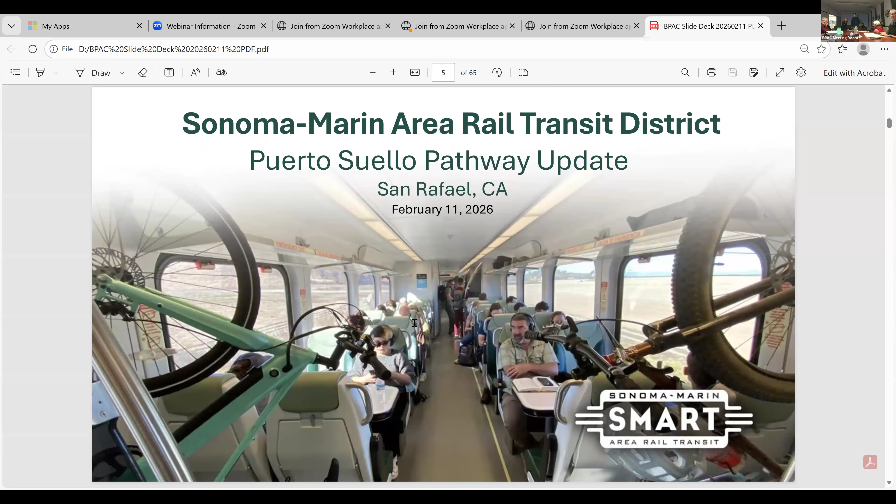So there's our SMART Train. Hopefully people have ridden the SMART Train. I was going to say, I know some people are probably very familiar with this area we're talking about. So you've ridden on the bike path parallel to 101, the Caltrans bike path. You're coming up here, and currently there's a choice: you can go down Los Ranchitos Road with the cars, or stay on the Caltrans path and go down Merrydale Road, which is a little steep, with lots of driveways and cars. So that's the current situation, and then you get to meet back up with the SMART Path.

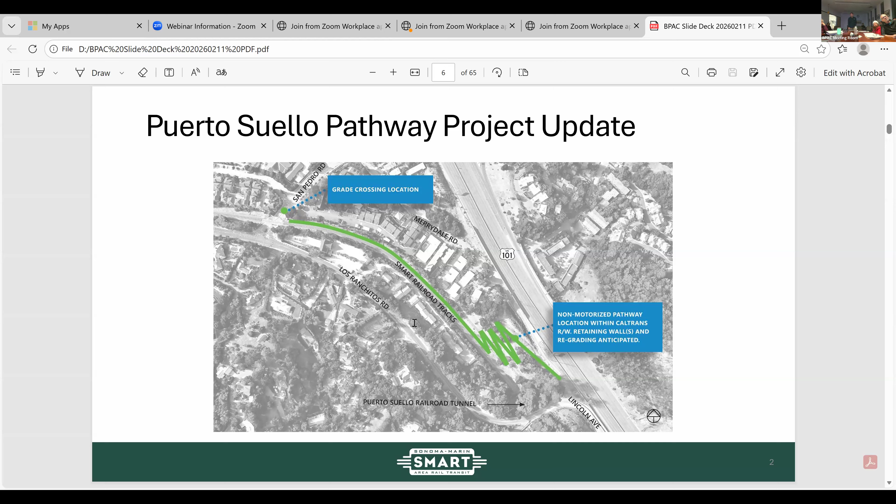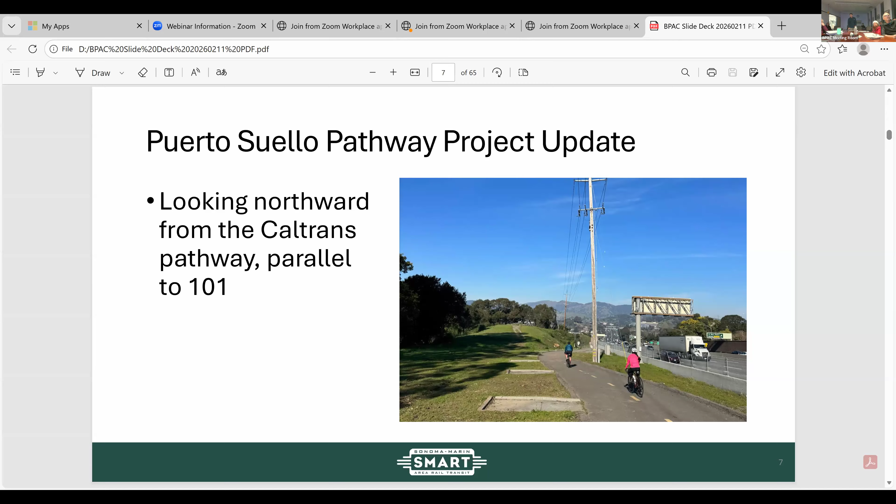In May 2022, a feasibility study was done, and there had been work done prior to that looking for a better way to get from the Caltrans path. Various routes were studied, and at this time, the path we ended up furthering the design on was decided to be the best option.

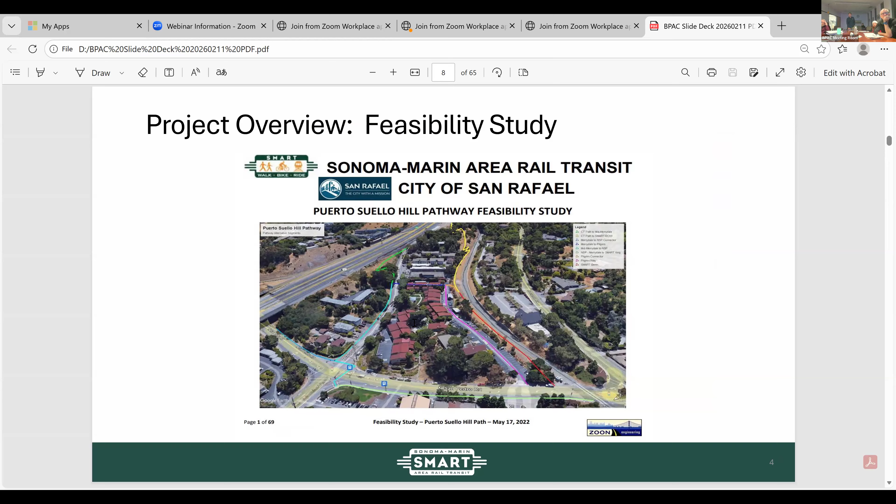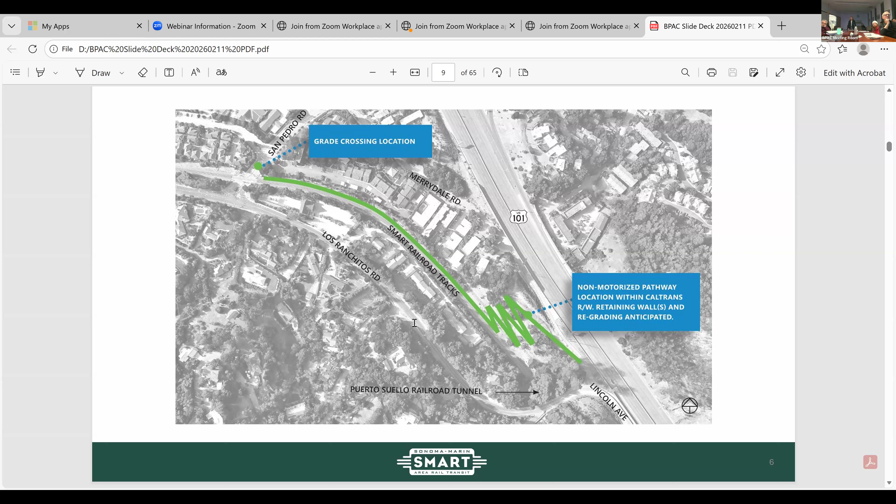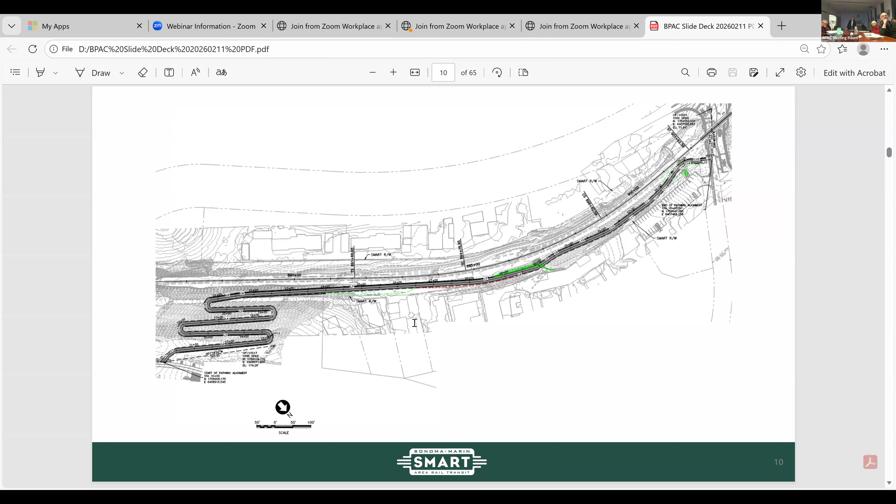The existing slope is 2 to 1, or 1 to 1, which if people aren't familiar with that terminology, that's basically for every 1 foot horizontally you're stepping, you're going up 1 foot. So it's 1 foot to 1 foot versus 2 to 1 -- it's a little more gentle, but still really steep. And so we kind of hit these bends, and you start the rounded switchback portion.

What that does is, as we get halfway through kind of the straight edge, you need a retaining wall to hold back the existing slope. We're kind of cutting into it and then switching back again. So that process repeats. We have some chain link fence closing those gaps of the retaining walls, and the switchbacks themselves being rounded -- there's some unique features there too that we'll discuss.

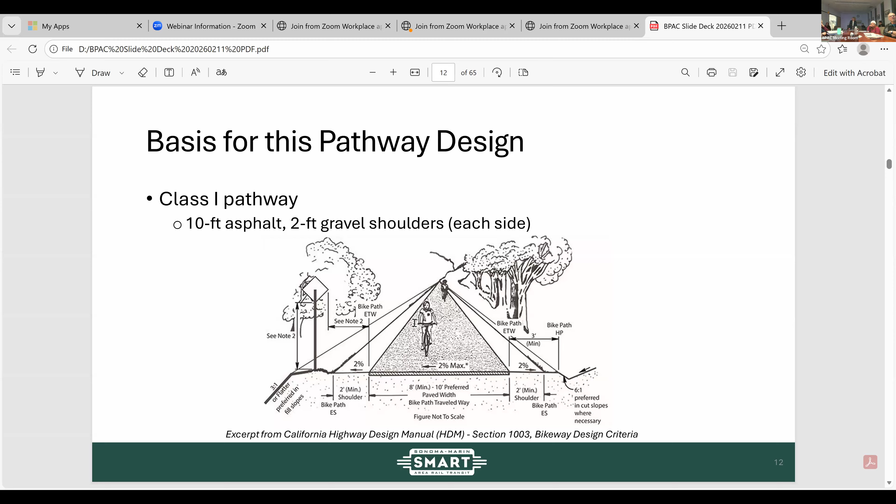Next up, for the fence -- obviously the exact typing can be determined, we're still at that preliminary 30% design. As the graphic shows, kind of a standard chain link fence. Smart has a sort of standard black vinyl clad fencing as well. It's a little shorter, but would still aid in kind of containing users of the pathway to use the actual footprint of the pathway and not decide to deviate or have a little adventure.

And so a chain link fence on the track side for that long linear portion, separating the tracks and the pathway. And then, like I said, closing the gap between the retaining wall systems and kind of the downhill track side of those various kind of stepping switchback portions.

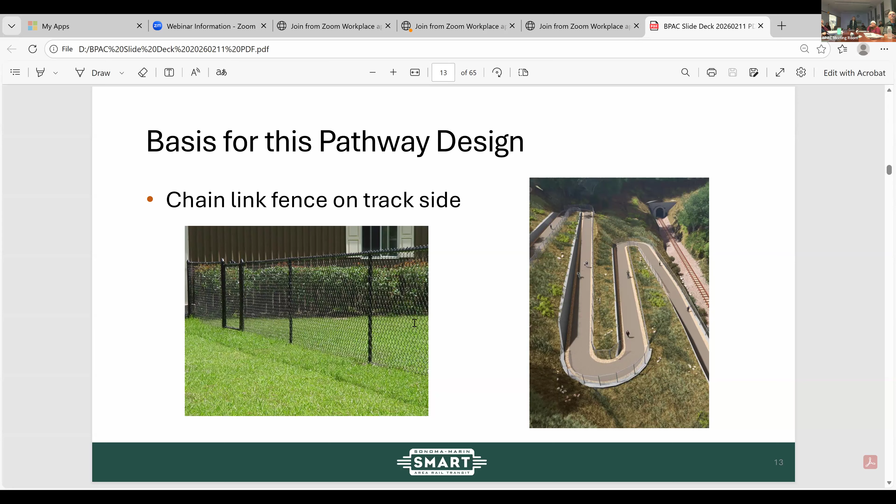The pathway is going to meet ADA requirements. So it's not only going to meet the Caltrans guidelines for a class 1 pathway, but we worked hard to try to make this shared use facility usable by all ages and abilities. Part of that, not to get too deep into the math here, but we are able to have a longitudinal slope of 5%, which is the ADA max for a pathway like this.

What that means is similar to a 1-to-20 slope. For every 100 feet that you would be cycling, jogging, or walking, you would just be rising about 5 feet. If you can visualize that triangle, that's about the gentle slope maximum we wouldn't exceed for this pathway. It's particularly pertinent for the switchback portion where we're having to really make up grade quickly. The long, spoon-handle parallel section only touches 5% when it absolutely needs to.

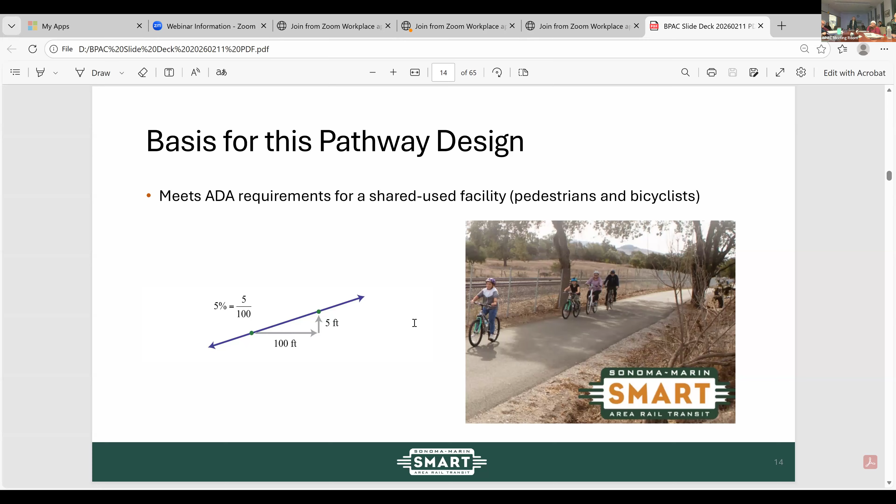The class 1 pathway preferred is 10 feet of asphalt with 2-foot gravel shoulders. We're actually proposing 12 feet of asphalt around those bends and curves, with 2-foot shoulders on each side, to better accommodate two single, non-tandem riders going up and down the switchback at the same time, as well as tandem bike movement.

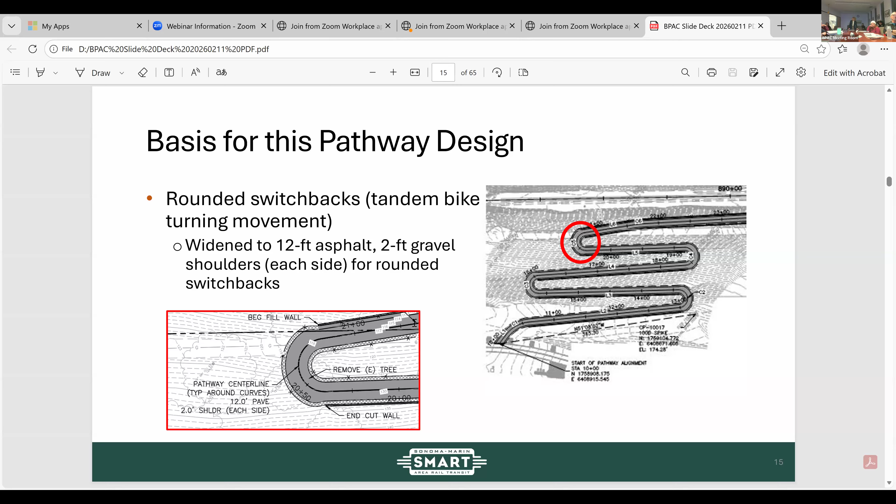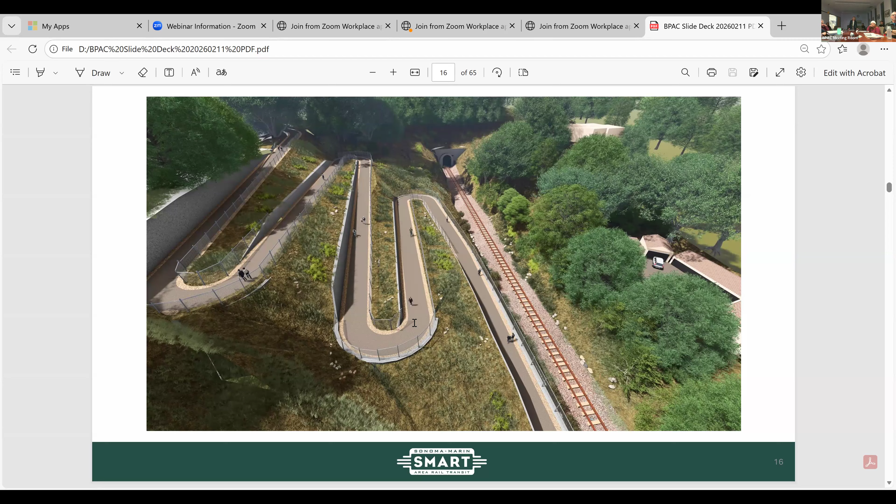So those are some of the high-level design features: retaining walls, fences, making sure those rounded switchbacks are as gentle and accommodating as possible, and trying to uphold all the class 1 typical smart pathway features. So with that, I'll turn it back to Judy.

Great. I know some people are very familiar with our smart pathways, and eventually we'll have the bike path the entire length, all the way up to Cloverdale. But we have 39 miles already completed, most of it class 1.

And right now we're extending the train up to Healdsburg and able to simultaneously build the path at the same time, which is nice. That was the same thing we were able to do with the extension to Windsor. So that's what we had just done already, but now we're in Novato.

There's a couple sections like that Hannah Ranch section I'm working on that's funded. Also in Santa Rosa, between Burnville Road and Airport, is funded. And then getting all the way to Healdsburg, that's funded. So those are the ones that are going now.

And then we have some others that are well positioned for grants and they're partially designed. What we tend to do now is design-build contracts, because it just works out really well—you often encounter utilities, soil conditions, or drainage issues. So it's tending to work best, especially since some of the sections we have left to complete are maybe the more challenging ones.

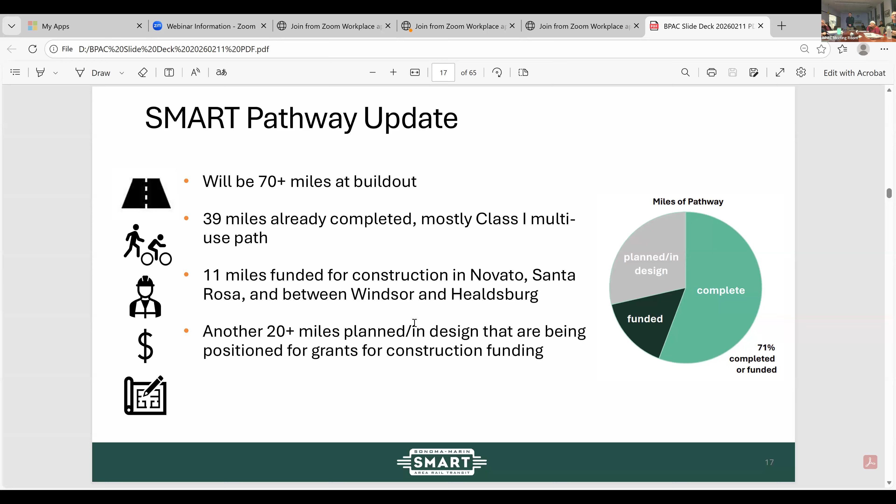So these are newly opened ones. If you haven't been up to Windsor, there are a couple nice connections there in Petaluma, Southpoint. Now you can go to Penngrove, and also Rohnert Park and Santa Rosa are now connected, as well as some people have been on the new section at McInnis up to Smith Ranch Road.

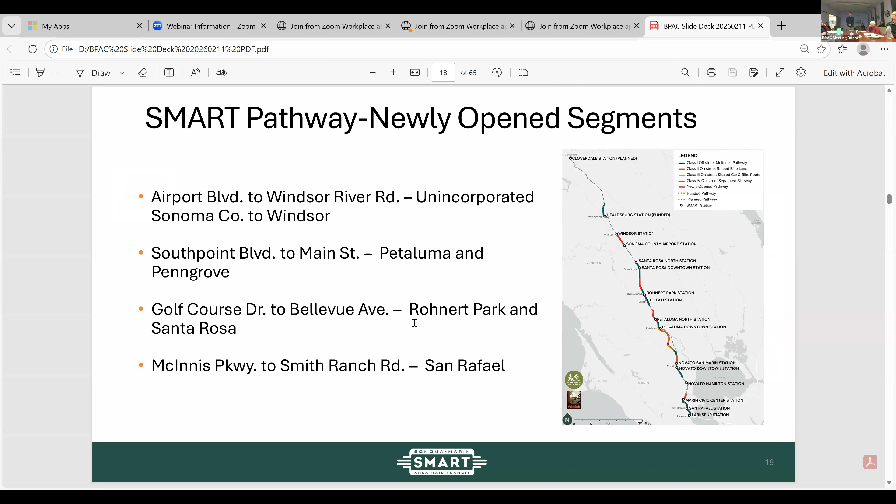And so we have now reached this 30% design milestone, and at this point, unfortunately, we can't just build it right away. We have to kind of put a pause here because we do need to get the funding to be able to do this.

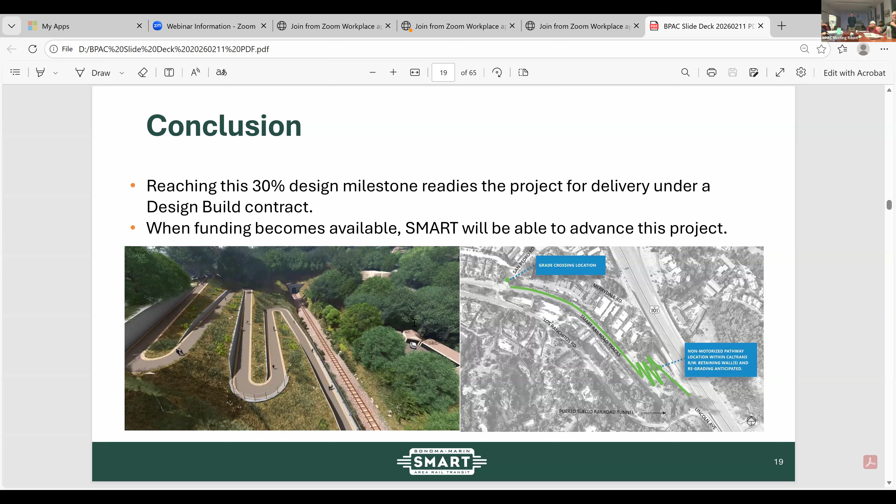And the great thing is we have a team of people that work on obtaining grants, and we've been successful with some. So we're working to do that. We're going to continue to provide updates. Right now we can answer any questions you might have.

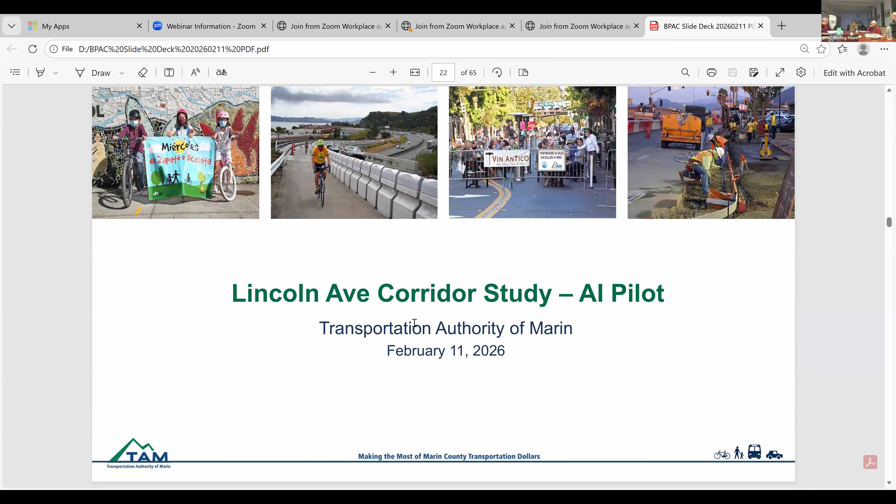Are you all familiar with TAM? We are the sales tax authority who administers the transportation sales tax, half-cent sales tax, working a lot on projects, plans, and programs all throughout Marin County.

The quick agenda of what we will flip through today: provide context and framing as to what the countywide transportation plan is, what the study's background is, context for why we're diving into artificial intelligence and relating it to Lincoln Avenue in this corridor. Then we'll walk through some of the high-level findings and potential treatment options that the tool developed, and dive into discussion and feedback.

TAM adopted the Countywide Transportation Plan 2050. Is everybody familiar with that plan? The Countywide Transportation Plan really lays out this roadmap and defines values, goals, and strategies for how we look at transportation within Marin County, systemically and holistically, focusing really on safety, equity, and sustainability at the core.

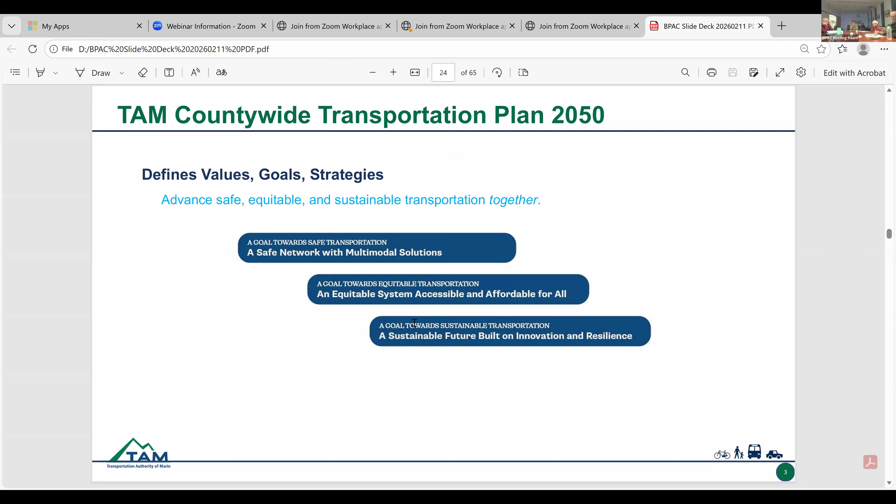Within the CTP, for short, there's a lot of acronyms, so if at any point you see an acronym that doesn't make sense, please just start waving. Within the CTP, we identified across the county several different networks, including active transportation networks regionally and transit priority networks. Because of the limited roadways throughout the county to really identify some of these arterials for opportunities of transportation, there are a lot of locations where there's conflicts modally that exist.

So we wanted to explore what the opportunity might be to use something like an artificial intelligence tool to help us reconcile a lot of these conflicts that we're seeing.

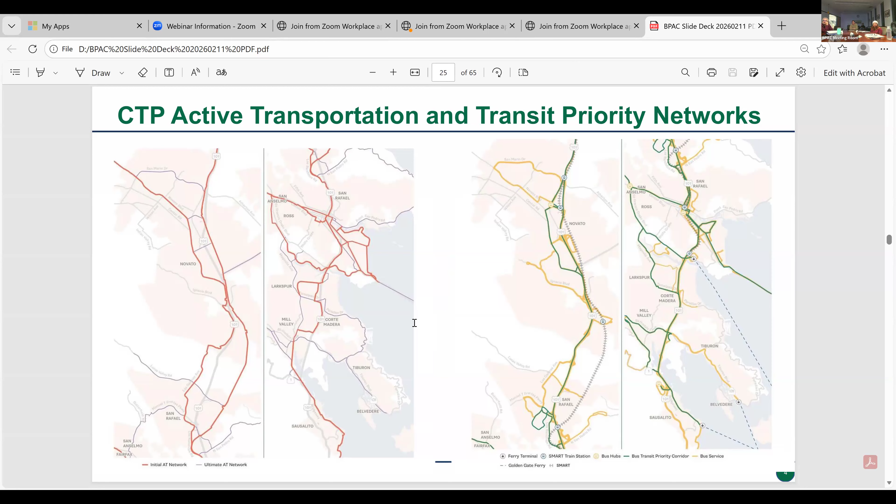While we're looking at addressing some of these network conflicts, we really wanted to focus on areas where there's super constrained right of way. There's a lot of existing modes of transportation in that area as well, and we tried to pull on other existing data that we have. But a lot of these corridor studies are really time intensive and funding intensive, costing hundreds of thousands of dollars to conduct with a consultant.

So we heard about this opportunity to better integrate AI, artificial intelligence, to improve the speed of analysis, shorten the time frame it takes to conduct a corridor study, and reduce the total cost. It's actually $14,000 to conduct the study instead of hundreds of thousands of dollars, and it also saves staff time in reviewing.

So this goal was really to understand the feasibility and practicality of these tools, and in no way represents what our recommendations are for this corridor. We really appreciate the city of San Rafael, Syed, April, and team for partnering with us on this. It's very much a pilot.

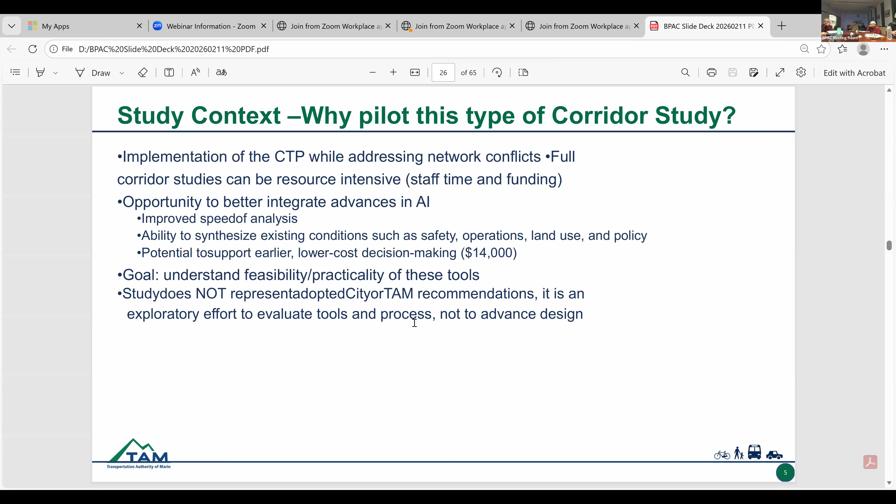We are hypercritical of AI and its use in this role at this point, but we do want to start dipping our toe into it to see what the opportunities could present. So please tear it apart if you see anything that is questionable and you feel like you want to dive in a little bit more. We encourage that, but we have been excited so far with the initial results.

Oh man, okay, I believe there was also a picture with this one too. No, the next one.

So why Lincoln Avenue? I'm sure you're all overly familiar with the constrained right-of-way in that corridor, as well as the conflicting modal opportunities there for transit, for vehicular access, and for active transportation, both bicycles and pedestrians, narrow sidewalks throughout the corridor, and some high stress crossings as well.

So we wanted to take an opportunity to look at our networks and where our active transportation priorities are, as well as our transit priorities, and look at the corridor with all the data we have available, using this tool for that.

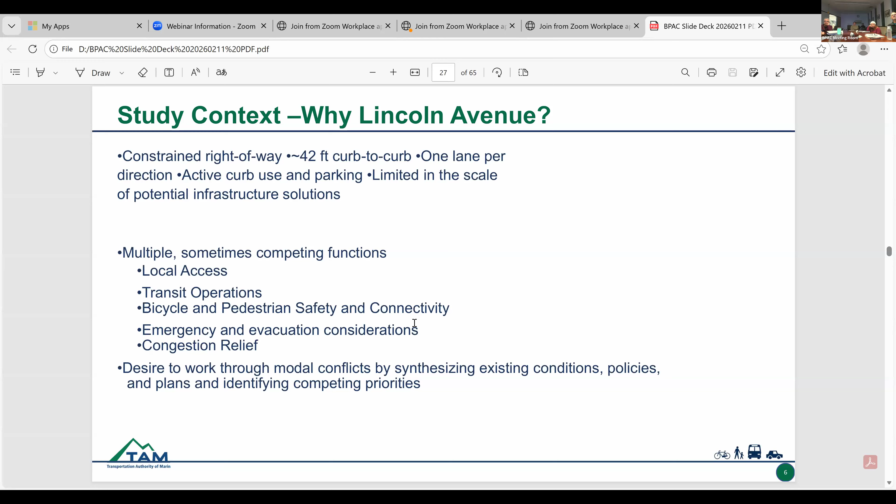So the study area, we wanted to capture the corridor, but also the residents and the land use in the area. We brought in some development context in addition to the transportation context. We're really excited with a lot of the mapping we were able to get from this effort. Typically these mapping exercises and GIS processes take a really long time and cost a lot of money for us to develop.

So we're really happy to just have a context-ready set of data that we can use and refer to moving forward. This corridor serves multiple roles: neighborhood access, primary local transit corridor, sometimes relief from Highway 101 from a vehicular access standpoint, and of course access for pedestrians and bikes.

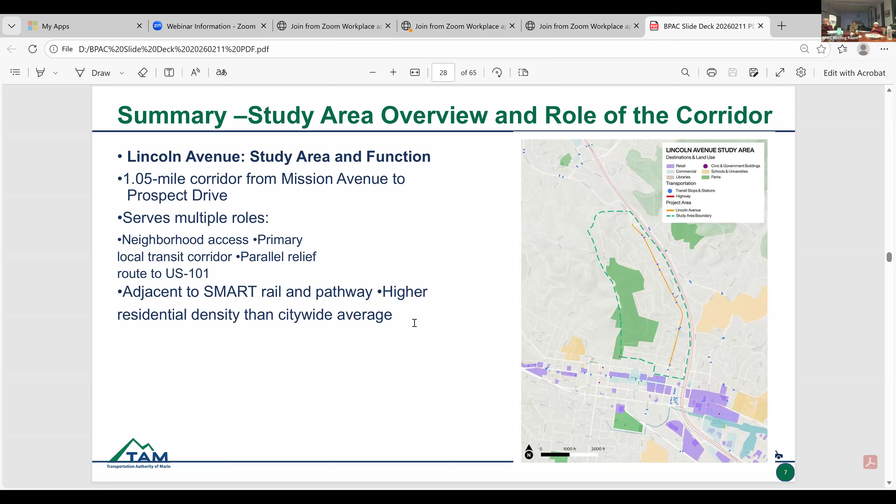Making sure it's pulling on all the existing plans, studies, and policies that are really relevant, both in San Rafael but also across the county and region. Organizations such as the Metropolitan Transportation Commission have their Plan Bay Area policies and transit-oriented community policies too, so we were able to integrate some of that as well.

So a few examples — I can try to reshare the PDF version so the bullets aren't just sitting right in the middle of the sentences — but it includes the City of San Rafael's General Plan, the Housing Element, the Marin Transit Short-Range Transit Plan, information on high collision corridors as part of the Local Road Safety Plan, the Vision Zero commitment. This is just a few of the considerations, in addition to evacuation route planning.

Waypoint Transit is the name of the company we partnered with. They ingested all the data and inventoried information relevant to Lincoln Avenue, then synthesized it to ultimately review what the findings and potential treatment options could be, based on existing conditions.

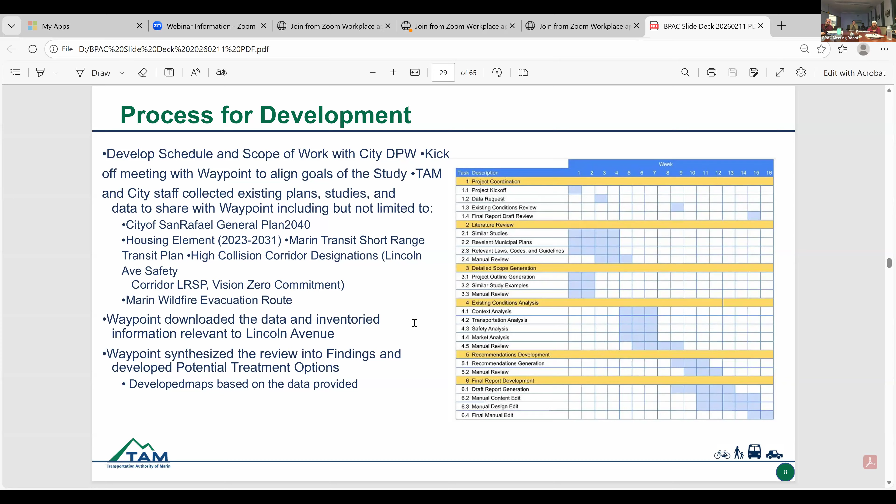I'm going to walk through the findings first and then share some of the potential treatments. So the corridor land use findings — we were able to get these wonderful maps, which are really an inventory of what housing exists in the area, what commercial exists in the area, residential and commercial, and see how recent development might pertain to the transportation.

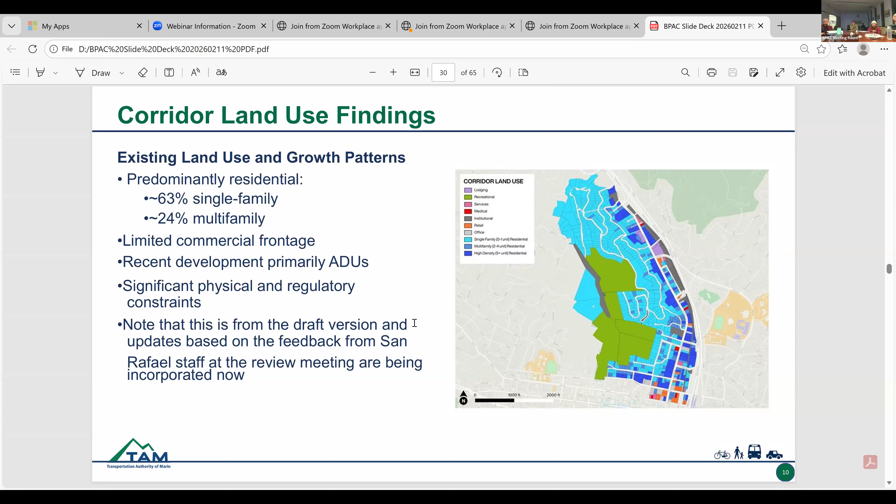As a note, this is very much in draft. We are still working on reviewing the final version of the study, so we're coming to you a bit on the earlier side to get that feedback and get a critical lens on what's been reported here.

They were also able to conduct parking and daylighting findings. As you're all hopefully aware, the daylighting law passed about a year ago and is now currently in effect, so they were able to analyze where the existing parking is within the corridor, and whether any areas may or may not be in or out of compliance with daylighting.

In total, there's over 170 on-street parking spaces. It does vary by curb type and the peak hour restrictions as well. There's time-of-day parking available, but overall, it does largely comply with daylighting requirements.

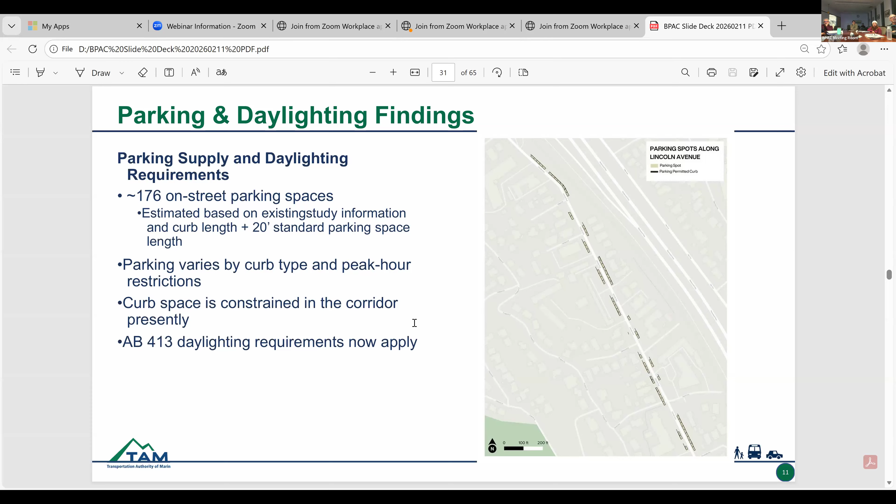On the active transportation front, sidewalks are generally present throughout the Lincoln Avenue corridor. They're spotty in some places in the residential neighborhood just to the west, and there are in some cases higher levels of pedestrian traffic stress due to lighting conditions and vehicle speeds in the area.

So generally we're seeing about a level of traffic stress 3 along Lincoln Avenue. The SMART pathway does provide a low stress alternative—it's class 1 pretty much the entire way. So we're looking at that as an opportunity to potentially increase public access points and assess what the spacing best practices are as well.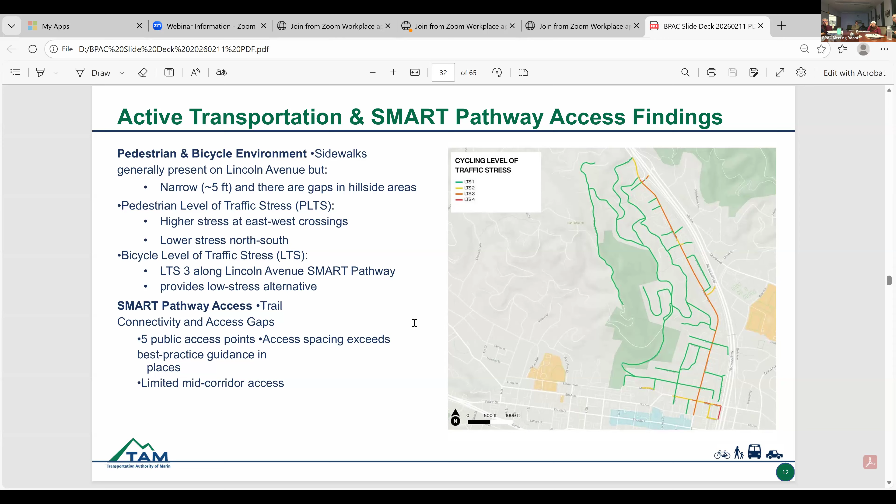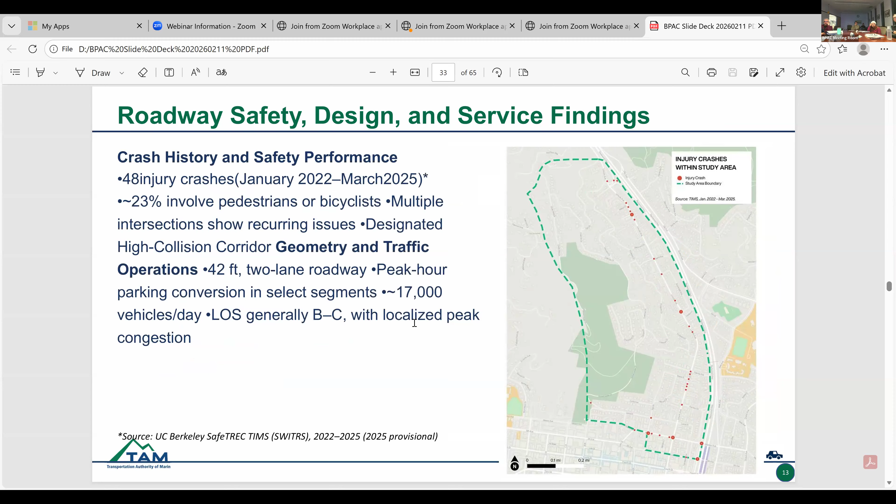Roadway safety design and the level of service findings—what that is. It went through and analyzed the geometry of the roadway, 42 feet, a 2-lane roadway, what the peak hour volumes are for traffic, and what the level of service is through the area, meaning the average traffic delay and how that pertains to transit, active transportation, and other elements.

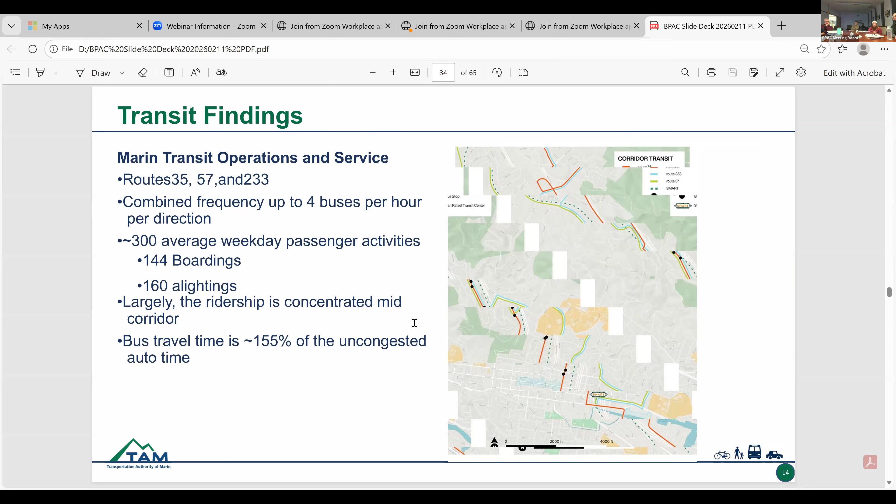The transit findings: there are 3 transit routes that run along Lincoln Avenue, with combined frequency of up to 4 buses per hour per direction. Fairly frequent boardings throughout the corridor as well, largely concentrated in the center, but the bus travel time can be longer in comparison to the uncongested auto time.

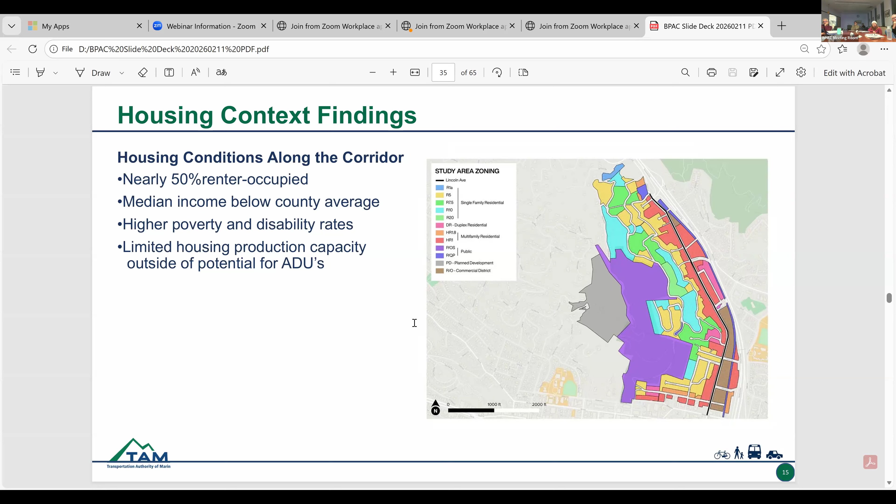Housing context finding: nearly 50% of the units in the area are renter occupied. Their median income is slightly below the county average. There's limited housing production capacity outside of the potential for ADUs, noting that the density of housing changes whether it's on the Lincoln Avenue corridor or further west in the hills.

As a note, the potential treatments and solutions framework developed as part of this study is cited as recommendations—we want to make sure these are not recommendations in any way for the corridor. It's just working through what the options could be based on the constraints and modal opportunities.

It also included existing funding awards. There's an HSIP grant in the corridor, so it was able to pull in some of the ongoing projects and work already being done to use that for context for its recommendations.

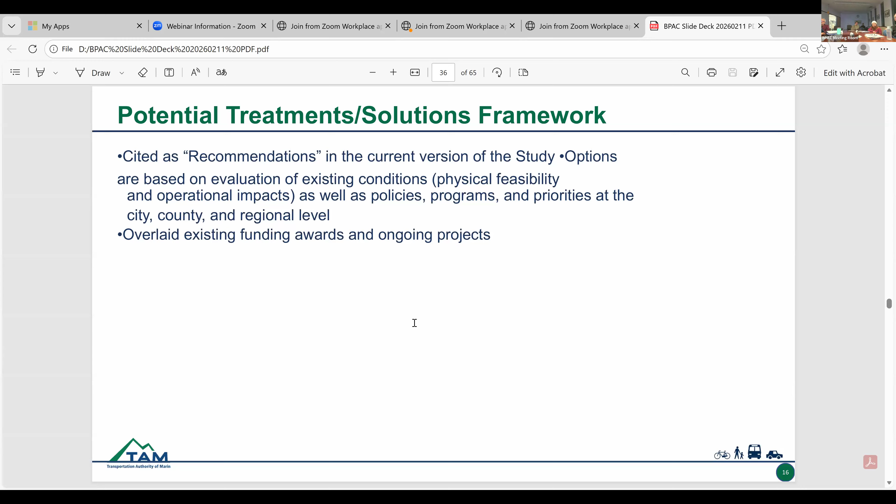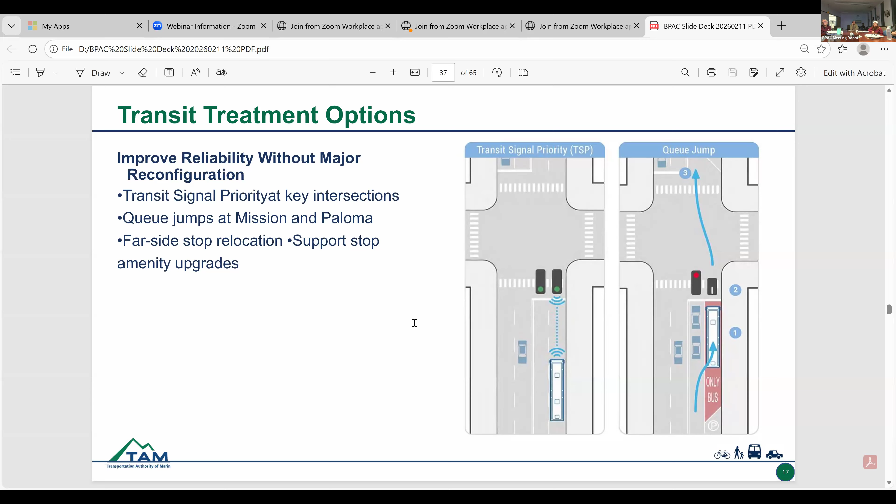For transit, there's really an opportunity within the corridor to look at improving reliability without major reconfiguration. Transit signal priority can be an opportunity at different intersections without much major reconfiguration. There's not a lot of space for bus-only lanes due to the constrained environment and the need to accommodate parking, travel throughput, and pedestrian right of way. But there are locations where things like queue jumps could be evaluated, and relocating stops to the far side rather than near side in alignment with best practice.

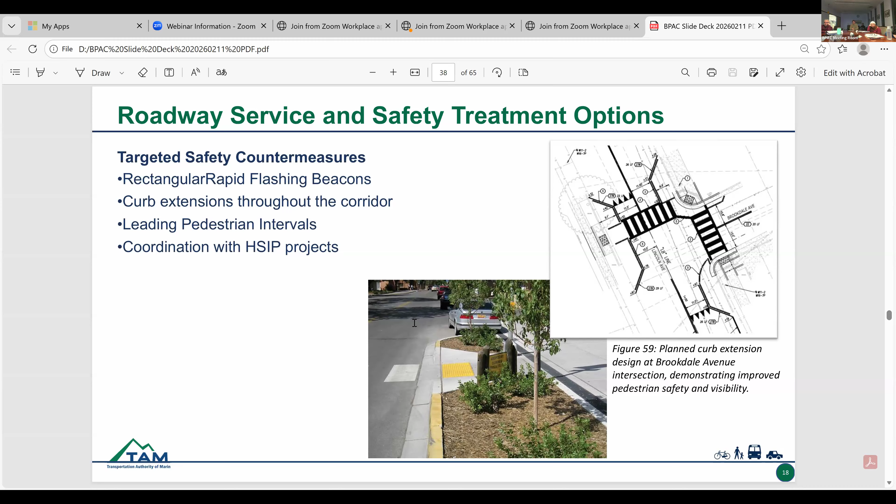For the most part, the findings show it would make the most sense within this corridor to shift most cycling off towards the SMART Pathway and increase the wayfinding. It also shows some of the context of navigation getting to the SMART Pathway and presents opportunities where that could potentially be improved.

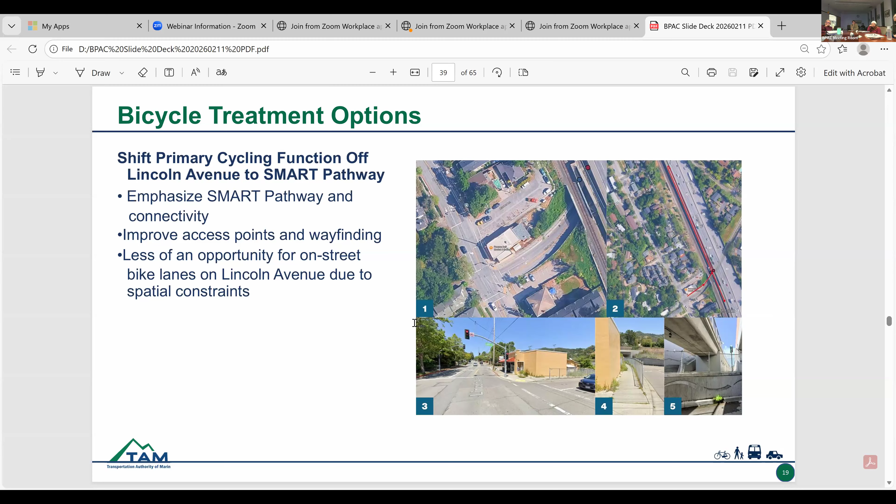So for each of the recommendations and at each of the intersections, it includes both the existing conditions and the potential treatments that could be considered. We're working on this in draft, but we're hoping to have a final version in the coming weeks—so we're reviewing that right now.

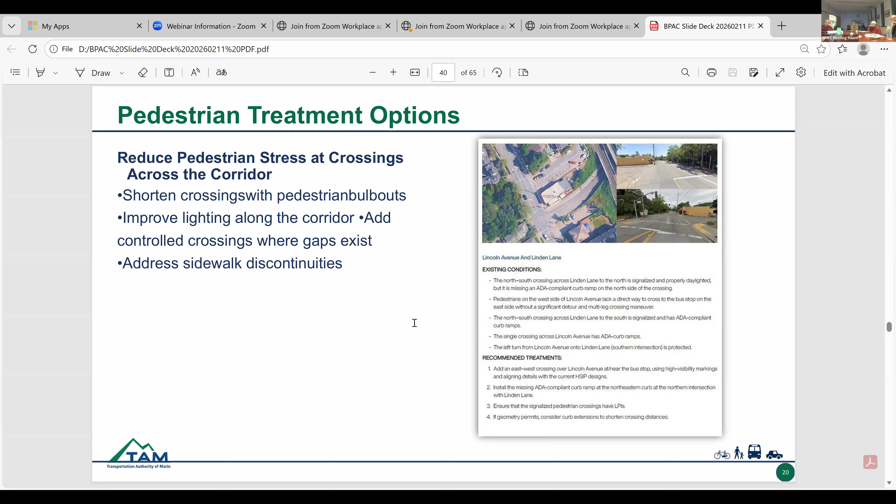A lot of the pedestrian stress could be lowered across the corridor by shortening crossings with pedestrian bulb-outs, improving lighting along the corridor, adding controlled crossings where gaps exist, and addressing other sidewalk discontinuities where the sidewalk doesn't continue in the hills.

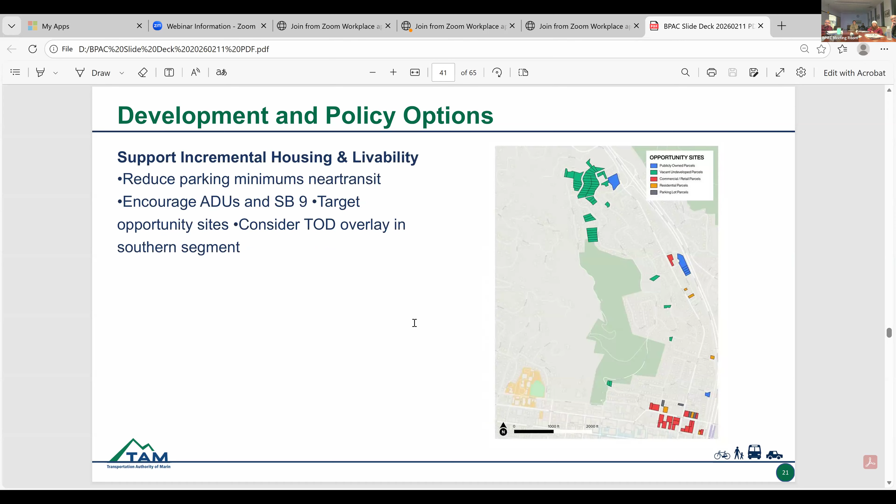There were also some development and policy opportunities included in the final potential treatments, including encouraging ADU build-out and considering a transit-oriented development overlay.

So ultimately, what the study did conclude is an intersection by intersection summary of both the existing findings, the existing conditions, and then what could potentially make sense with all of the context of the existing funding, the existing plans in place, and the existing development policies.

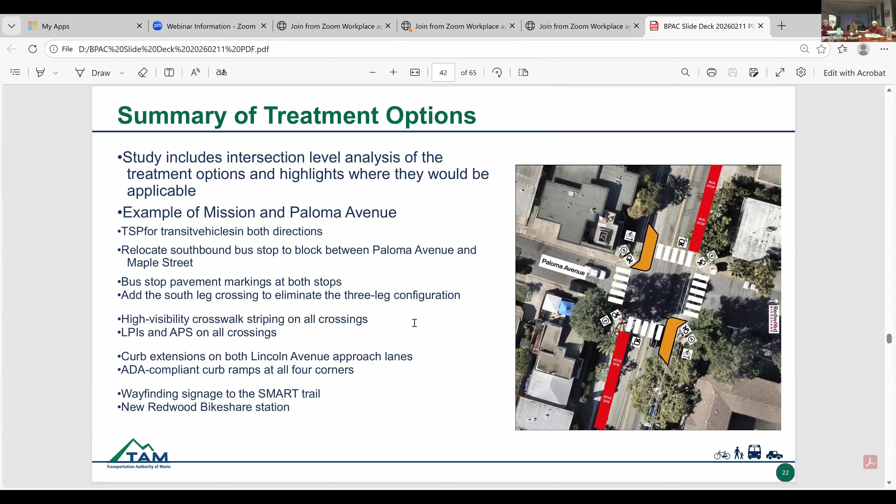At a very high level, you can tell this is not at the extent of the smart pathway that was just presented. So it's very 30,000 foot and sketchy, but this is something that could potentially be evaluated, looking at places where Redwood Bike Share could add a drop zone and wayfinding towards the path, looking at far side bus stop relocation and pull-outs as an example.

So if there is anything in this study that jumps out as alarming or incorrect, we really want to know that. We're really appreciative of the City of San Rafael staff for partnering with us on this. We are evaluating if there are other places within the county across our networks, as identified in the CTP, where it could help us work through some of this faster and at a much lower cost than it would otherwise traditionally cost us to partner with a consultant for. But we do want to know if the information is useful, if there's any other way it could help resolve some of these conflicting issues using artificial intelligence, or what we need to change for this to really be helpful for you.

I'm hoping to show the document in just a couple weeks. It is 170 pages, so the one thing about AI is it's not brief. It tries to be very thorough, but we will make sure everyone has a copy of that. So I'm happy to take any questions. Thank you for the opportunity to present, and thank you for the work that you do also for your community.

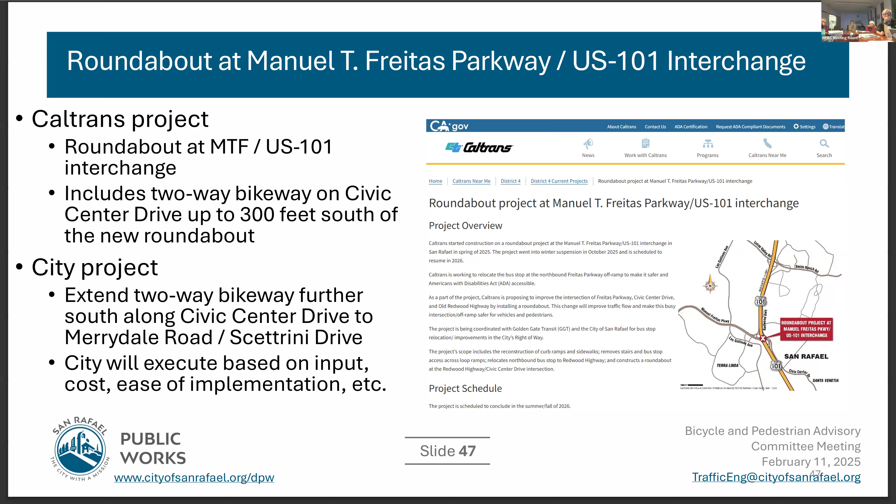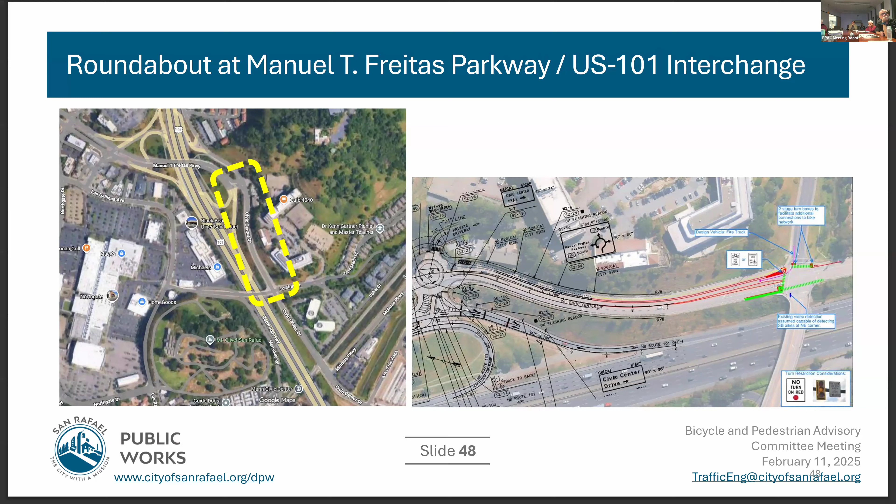To get our bearings, on the left is the overview. You'll see Northgate on the west of the screen, 101, and south of the interchange being redesigned here, turned 90 degrees. You see the roundabout, and Caltrans plans to design and provide — you can see some of the markings out there now — the two-way bikeway at about this point. So these are some of our conceptual concepts that extend their plans.

We'll talk about these two concepts. The first concept would extend that bikeway down to the next intersection at Merrydale. The primary challenge with the two-way bikeway is that eventually, when you get down past McInnis, the bikeway is on the other side of the street. So the two sides are going to have to cross at some point.

Just to help me understand, where does it start and end on where Caltrans ends? It's the black, it's Caltrans; the red is with the black. Good question. Caltrans design goes from the roundabout down to the end of the black markings, and then the red markups are just us overlaying with Caltrans design and extending that down to Merrydale.

So this first concept would facilitate southbound bicyclists from the two-way bikeway coming back over to the west side of the street in a two-stage crossing. This is somewhat traditional — you'll cross Civic Center Drive, then wait for the next signal phase, then continue with Civic Center Drive's phase, and you'd be back onto the right side of the street. There is existing video detection that would probably facilitate this. One of the challenges is this right turn is somewhat abrupt and at a bit of a skewed angle — not necessarily terrible, but it's a good extension of the two-way bikeway.

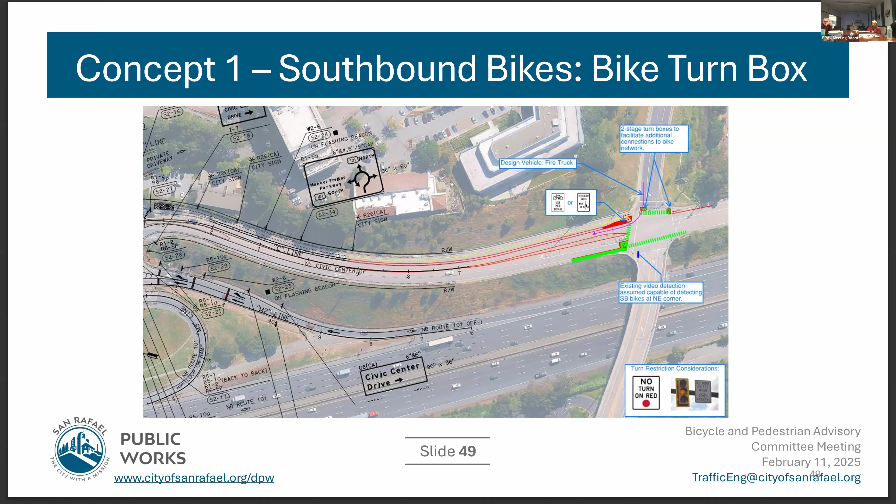So my second comment is choice A seems easier to not only execute but follow. I've been involved in crosswalks like concept two. Why don't we do questions and comments separately - okay, before discussion, alright, got it. Make sure we clarify. So, Bill?

Other than being completely out of scope of this project, is there a reason the two-way bike lane doesn't continue all the way down to McInnis Parkway and the continued smart path and the Merrydale crossing to avoid this situation? Other than scope and expense - I should answer. It surprised us that Caltrans dropped a two-way cycle track in the middle of the road. We wanted to quickly, because they're in motion, bring it to the intersection. So this is a quick project.

And then long-term would be the other half of this. Well, and Smart's working on their, for lack of a better term, kiss and ride area too. So trying to figure out what they're doing on that, but that's on that other property. But yeah, also trying to figure out what we're gonna do on the South Merrydale path. So there are other things going on that will affect that.

So yes, someday long-term you envision a connector. Correct, likely, and I'd say more likely when we slurry or pave, because usually when we do this project we look at doing more improvements. So this is like, get here, and then next is when are we gonna do this road so we can look at more stuff. Also, moving the cycle track to the other side, as you said, is taking it out of the off-ramp traffic, and then it connects to Redwood Highway.

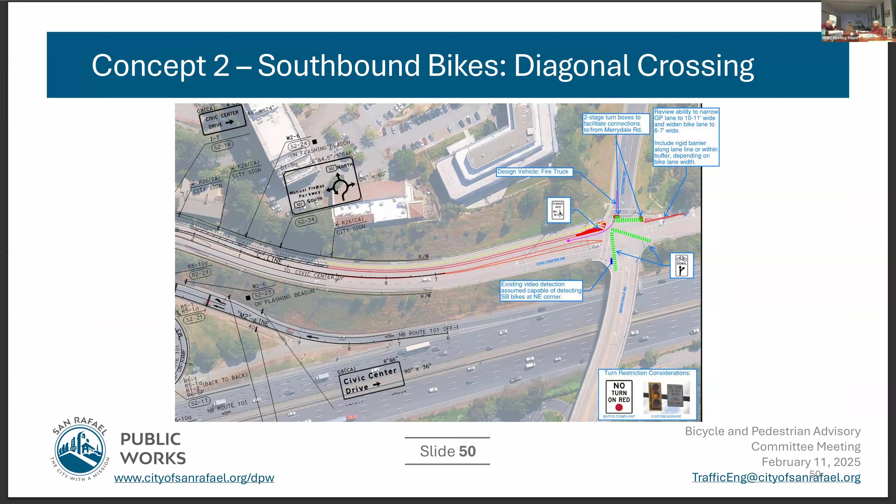Could you go back to the other one? Yeah, so in my experience with this, often it goes in phases down that road. You can have periods when there's no traffic at all, and then you'll get 3 or 4 cars coming through. Often bicyclists will just blow through a light, they won't stop if it's red and there's nobody around necessarily. So that diagonal makes me a little nervous coming across there.

So I'd be more in favor of option 1. It's a move we're not used to, that move is... is there any data on diagonal crossings in America? Because maybe in another country, but it feels better, the diagonal one.

Right, approved. Briefly, I'd like to append to my comment: if there was a no turn on red there, I don't have a preference, 1 or 2, honestly. If there's a no turn on red from Merrydale onto Civic Center Drive, this would be west, pointed down that direction, I think that would be reasonably safe for either of those. But that would be my concern, that movement of traffic.

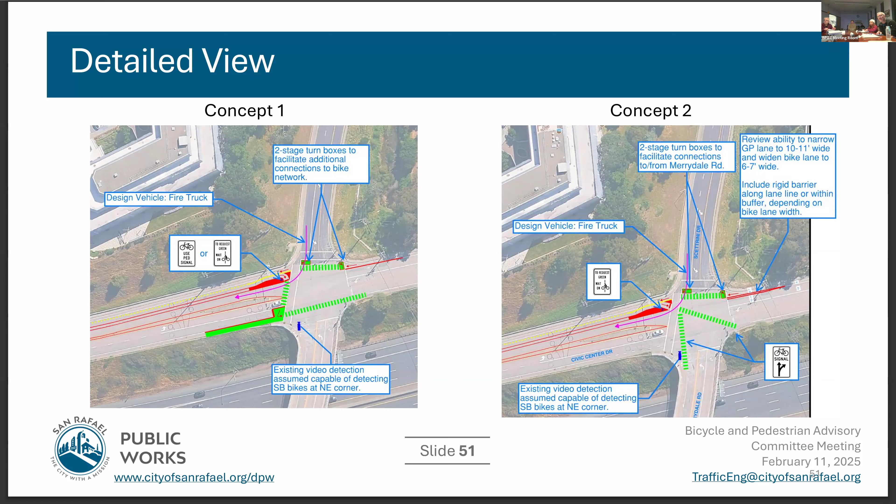So, we have a slide. We do. Looking at the project manager. All right, great. Would you please introduce yourself? I will, as soon as I figure out how this thing works. Yeah, there we go, okay.

Good evening, John Thomas, I'm a senior project manager with San Rafael Public Works. This is not as exciting, we don't have a fun project for you guys to poke holes at or otherwise talk about, but...

The project we're talking about: the city was afforded an opportunity to purchase the land at 620 Canal, at the end of Canal Street on the water on the canal there. There's been a lot of different plans within the canal neighborhood for various improvements, one of which is a desire for a park. When this opportunity came up, Trust for Public Lands, County of Marin, City of San Rafael, and other private donors came together to put together the money to buy this property. It's the first time it had been for sale in almost 90 years, so this was just an opportunity that I think all involved felt we couldn't pass up.

So now we have the property. The property was transferred over to the city. April received the keys a few months back, and all that goes along with that, which means more maintenance, etc. But obviously now the next steps are figuring out what we're going to do with that.

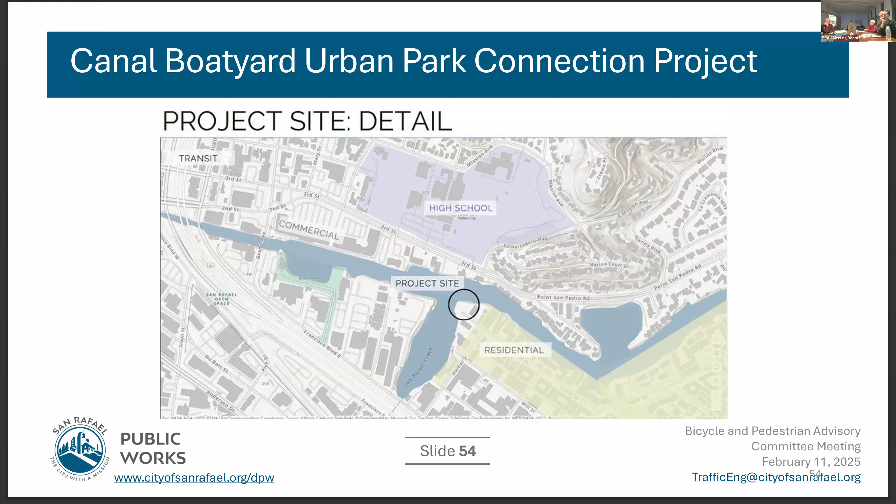So there's lots of other things. One of the other key elements that's probably of interest to everybody here is also the city has been contemplating a crossing of the canal at this area. And this site will provide for the southerly abutment and launching point for something like that in the future, should the feasibility study prove that we can move forward with it and it's something we can fund. So there's lots of other potential benefits that come along with that.

One of those is that this would provide for a safer, shorter connectivity for the Bay Trail. There's sort of a missing link in the Bay Trail throughout this area. So we would be able to, together with some other improvements along canal, and with this connection, make a more streamlined Bay Trail connection in the area.

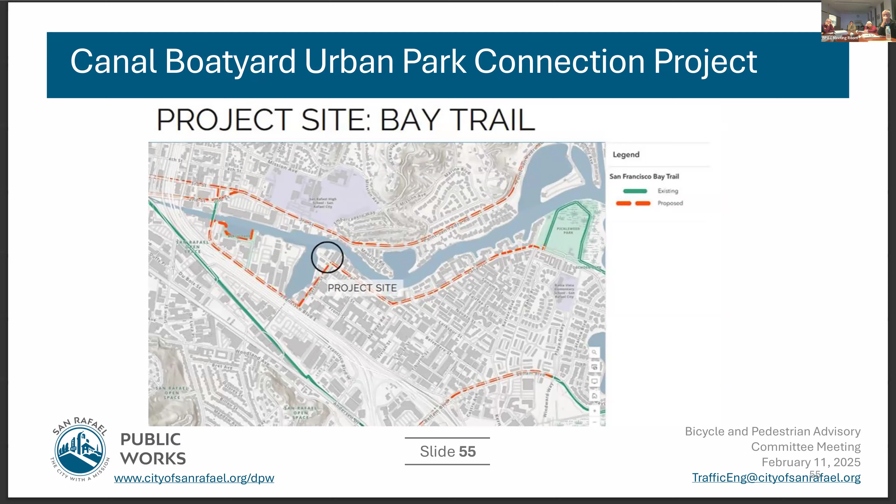From that point forward, what I have is the checklist itself. You'll have that in your packet as well. I don't want to go through and read these things; this is sort of the summary we just talked about. This is a former boatyard, so we have lots of things to do: clean it up, raise it to deal with climate adaptation and settlement issues and the like that are in that area. But also, in the future, have a park that all can enjoy and use, and provide connectivity between the Canal District and all the areas to the north.

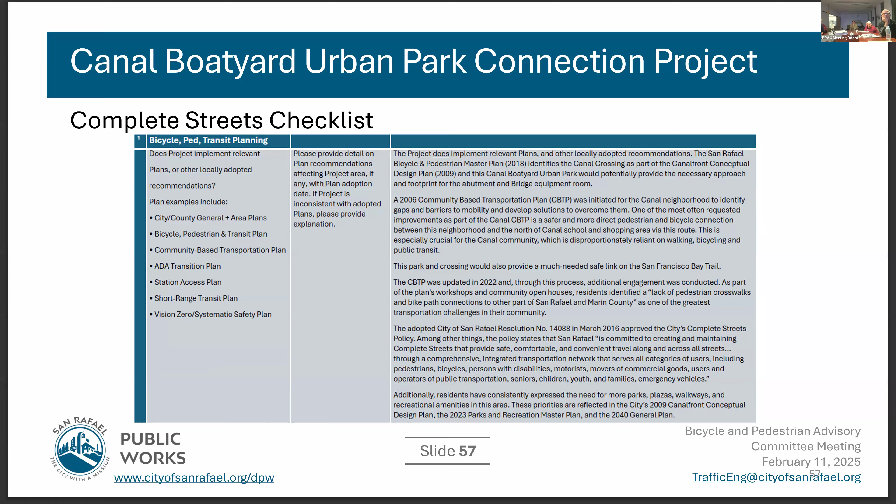The checklist asks about various plans that have been in place. This goes through and summarizes all of them. Again, I'm not going to read all of those. If you have any questions on them, April probably knows much more about them than I do.

So does this contain segments of the regional active transportation network? Again, this goes back to if the canal crossing is constructed, we could include either a pedestrian and bike swing or lift bridge over the creek. We're looking at that again. We're hoping to put the RFP out later this month. So that's kind of an exciting parallel process that's going on.

Is this on the high injury network? This project itself is not, but it would afford bikes and peds an opportunity to avoid other areas which are, and that's the way we talked about earlier.

And the access areas. Does this seek to improve bicycle and or pedestrian conditions? Again, with this project, it can, and this is giving us that opportunity.

Are there transit facilities in the project area? I go through the several Marin Transit and Golden Gate Transit opportunities that there are, but those are over on Francisco and a couple of blocks away near a canal. Again, there are no direct effects to the transit agencies, so no notification has been made.

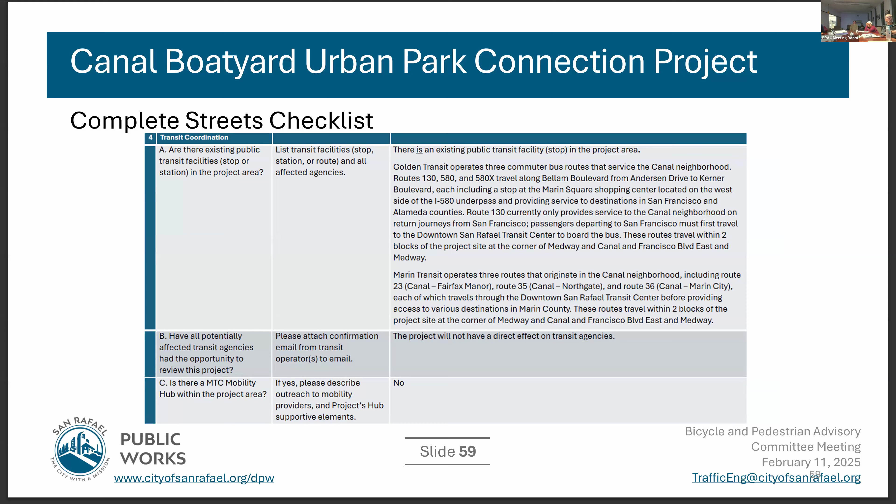Is there an MTC mobility hub in the project area? No, it's not, as far as I'm aware. What is an MTC mobility hub? Great question, I don't know how to answer that. But there is one under Hetherton.

Like, what is it? What is it? Is it an acronym for something? MTC is an Metropolitan... acronym, oh, but okay. Mobility hub is, I don't know, do you have a good definition?

I mean, the one that's underneath Hetherton is like where there's parking, there's EV, there's bike parking, it's right next to transit. It's a term of art for a pretty sophisticated thing. That's fair enough.

Sorry to interrupt. As far as future designs are concerned, we will adhere to the various design standards that are out there and pull from those.

Will this project improve active transportation in an equity priority community? I think as you all know, the canal neighborhood is an area of persistent need, and both projects can provide some of those improvements. So lastly, this is the step of asking for your review. Any comments and questions, happy to take them. We are supportive of your project.

Seems like the answer on a lot of these checklists is that the bridge is really going to be helpful, that the bridge is really going to solve this problem. That's because that's my project to work on, so yeah.

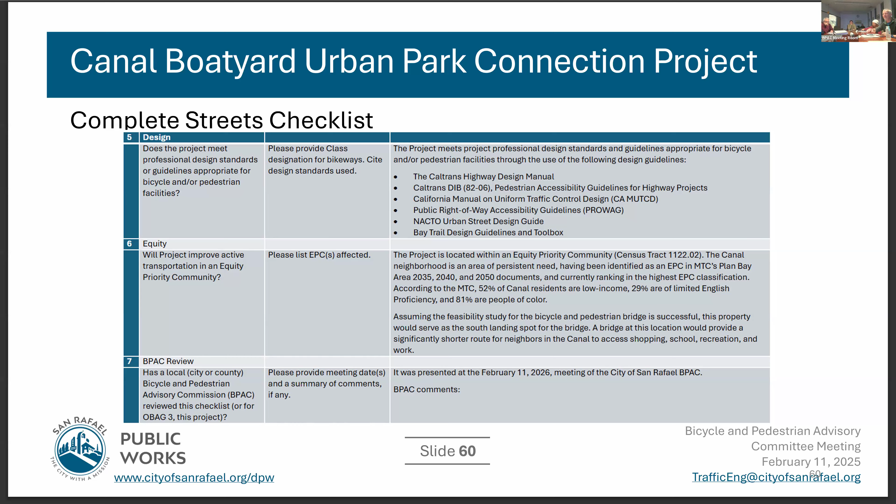All right, so that takes us to item 5, staff liaison. That would be me. The Francisco Boulevard East and Grand Avenue project turned on, it happened after our last meeting. On December 15th, it was activated. So far, the comments are positive. The striping is temporary paint because we have to do the asphalt slurry and the weather is not cooperating. Once we do the slurry, we will do the thermoplastic the same way it is now.

The city bike plan, the draft one is being prepared now. The outreach phase is completed. So the draft plan, or pieces of it, or the whole thing, we will bring it back next meeting, especially parts like the project list and priority. That will be the first time it's reviewed at our meeting. We presented the concept, the prioritization, the goals and stuff. Here is the draft report, but before we go to council, we want your feedback on all of it, or some part that we feel is important.

The Embarcadero one-way pilot was implemented on January 12th. It's currently allowing traffic only in the northeast direction. So from Mission, it's not allowed. We have a lot of positive and negative feedback. Some people think this is it, although this is a pilot, we're collecting data.